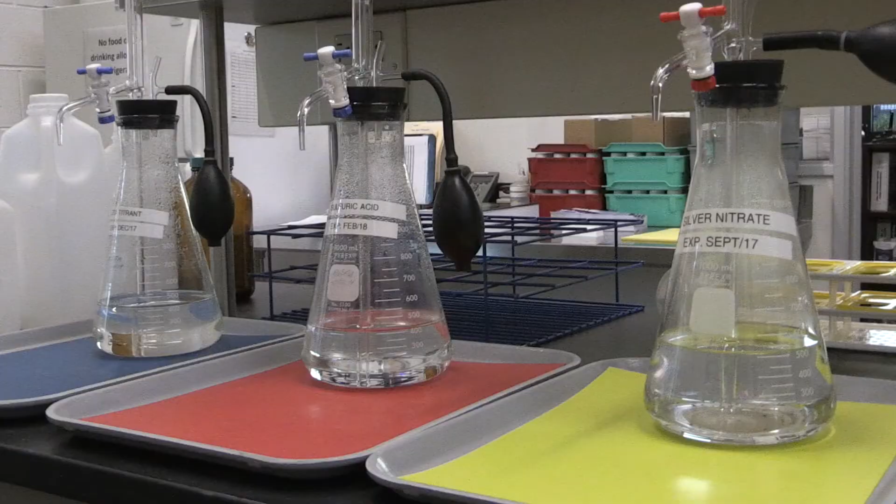I'd also like you to note that this is the utility yard where we are today. This is where all of our water, sewer, and storm drain crews are based out of, as well as our GIS, water quality, and water conservation. That's all here.

Also, we have the main corporate yard off Gothard, if anybody has gone to get sandbags during the winter or anything like that. Been to both locations. That's where we have our general services, inspection, maintenance operations, and signals and lighting operations housed. In addition, that is where we do material storage, sandbags in the winter, and also fuel storage and fleet maintenance.

We also have another yard called the Park, Tree, and Landscape Yard, which is also off Gothard, just south of Slater. That is where all the staff and equipment for all the park maintenance that we do, the tree trimming, all the mowing, everything else that we do is based.

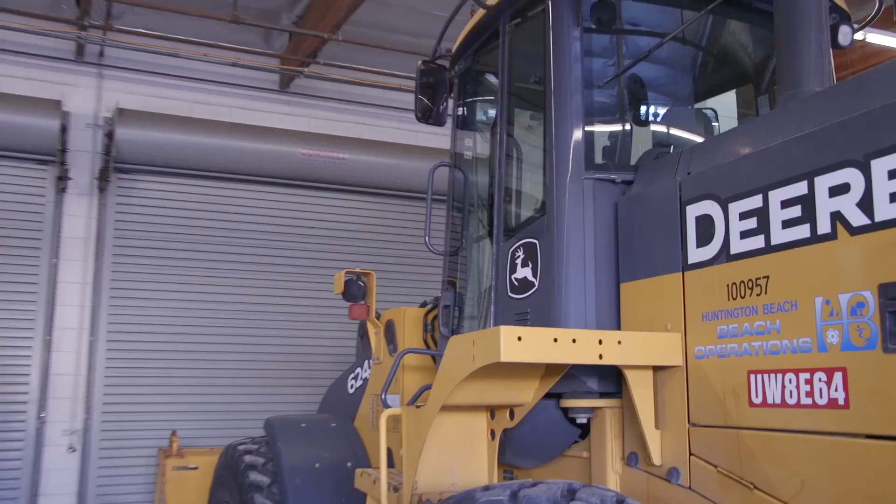And we have one last yard, which is actually a beach maintenance yard. Most of you may not know where it is. It's on Newland, right behind the AES power plant. That's where all the beach services is. They maintain all their beach equipment, all the stuff that sifts the sand and all those things that happen down there at the beach. That's where all that's housed.

There were 200 of them, and we all took a picture in front of our new senior center. Just so you know, the Public Works Department managed the contract to build it. So that's just another one of the things we do in Public Works.

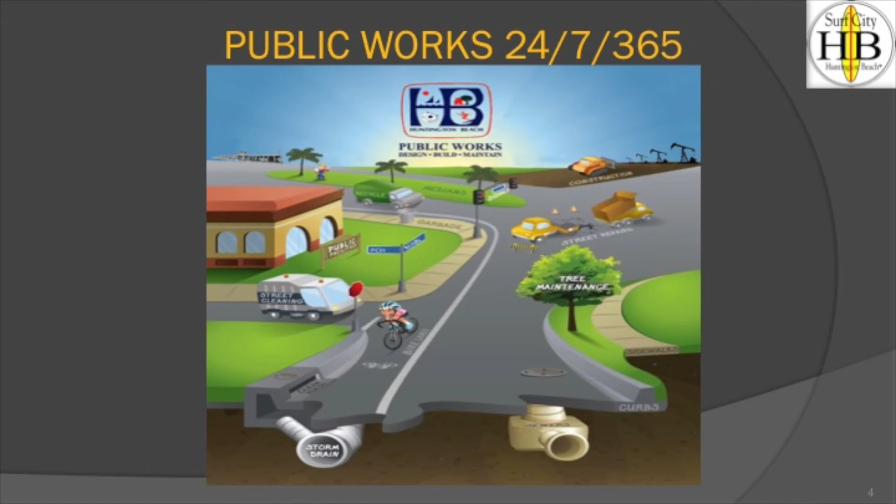Public Works is the foundation for our operations and maintenance of all the infrastructure which we have in the city. We have everything from street signs to our public facilities, refuse, medians. We actually manage the construction, street repairs, tree maintenance. We've got sewer, storm drain, we have it all. There's a lot of other cities in the county, like Irvine and others, that don't have water—they have an agency called IRWD that handles their water. We do it all. There's nothing that we don't do here in the city, other than we don't treat our own sewage. We get it to the sanitation district, but we don't treat it.

So what Public Works does, in a broad nutshell, is all the infrastructure planning, construction management, operations and maintenance of the city, which involves selecting and managing consultants and contractors, developing solutions or design concepts. We prepare RFPs for design and bids for construction. We also review development plans and entitlements.

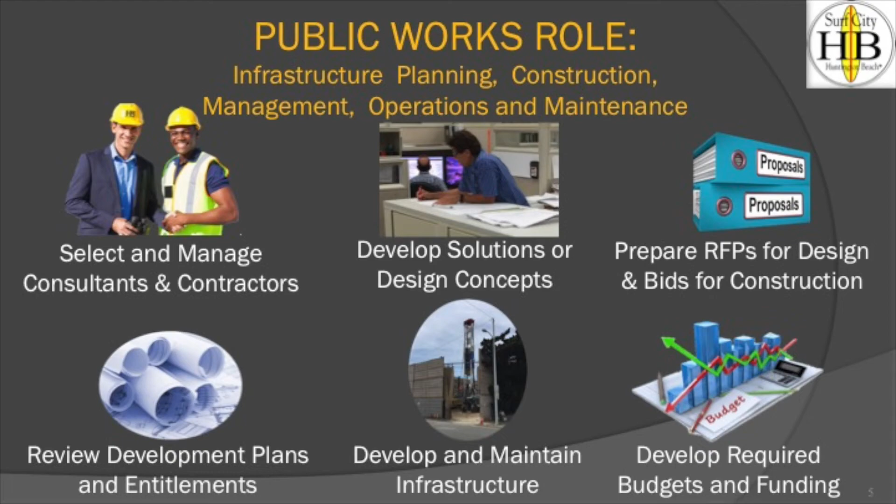All those people that come through with a single-family residential room addition, everything to Bella Terra, to wonderful stuff going down at the beach. We develop and maintain our infrastructure. We develop the required budgets and funding. We also coordinate and manage outside agency utility work—you see Edison in here, Time Warner, Verizon. They all come through us for permits and we manage them.

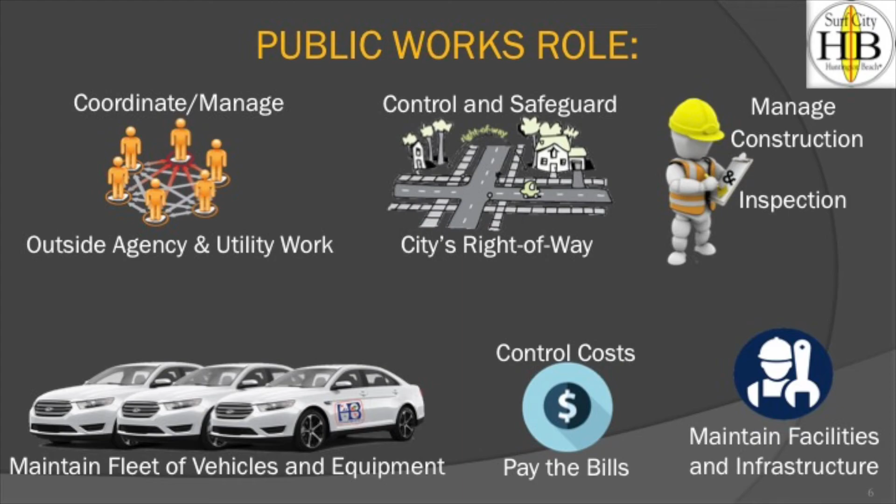We also control and safeguard the city's right-of-way. We manage all the construction and inspection, as I mentioned earlier. Jerry gets the fun of maintaining the entire fleet of vehicles, so we do all that here also. We control costs, we pay the bills, we maintain all the facilities and infrastructure, and we also do a lot of construction notification.

In addition, we do a lot of public relations and outreach like we do tonight. Whenever we have large construction projects, we always do a little bit of public outreach to the community, letting them know when it's going to happen, how long it's going to take, and how much they'll be inconvenienced. We also respond to a lot of Surf City pipeline requests. How many show of hands—how many people actually use the Go Request app? It's a great way to notify us of things that interest you, anything from tree trimming to you name it.

You just put it in the Surf City pipeline and we'll respond to you.

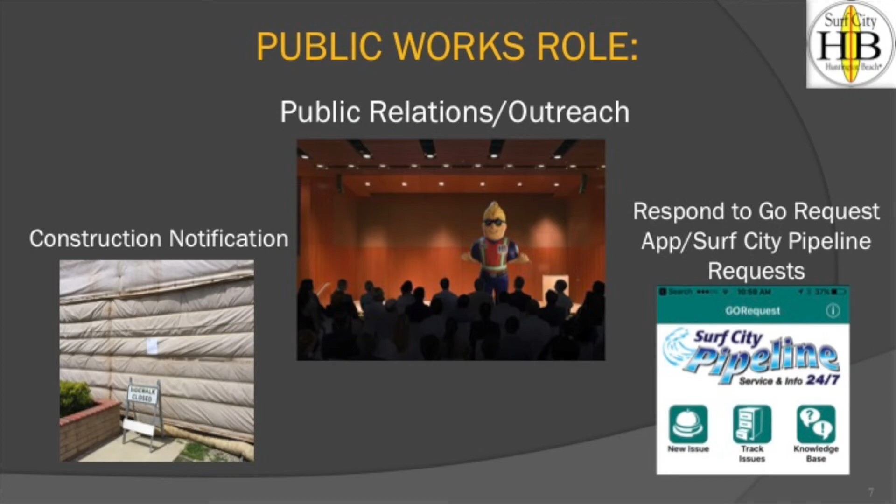It may be a good rule to not fix something that isn't broken, but with infrastructure, the lack of preventative maintenance is an expensive and sometimes dangerous tactic, and we call it deferred maintenance. The results come from too few dollars spread among too many competing interests.

So what we do is prioritize and strategize everything we do in public works, which leads into how we plan how we manage the city. We use planning documents such as the general plan and circulation element. It tells us what streets we have in the city and how we manage all that. We have a bicycle master plan. We do a lot of traffic signal modernization and rehabilitation. We plan all that out.

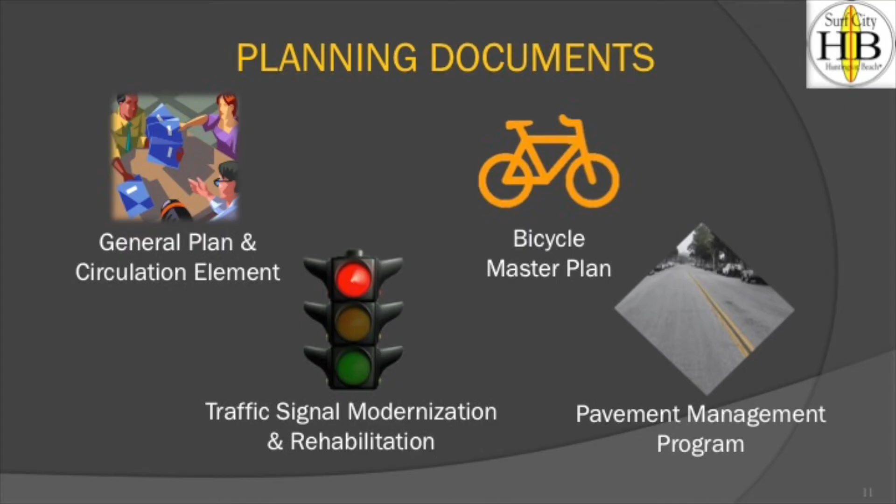We have a pavement management program. I have boards back there, where Tony's standing, that show going out 7 years where we're going to be within the city and how we plan to manage all the arterial rehabs, as well as the zone maintenance we'll talk about later. In addition, we have a facilities maintenance plan that Jerry takes care of.

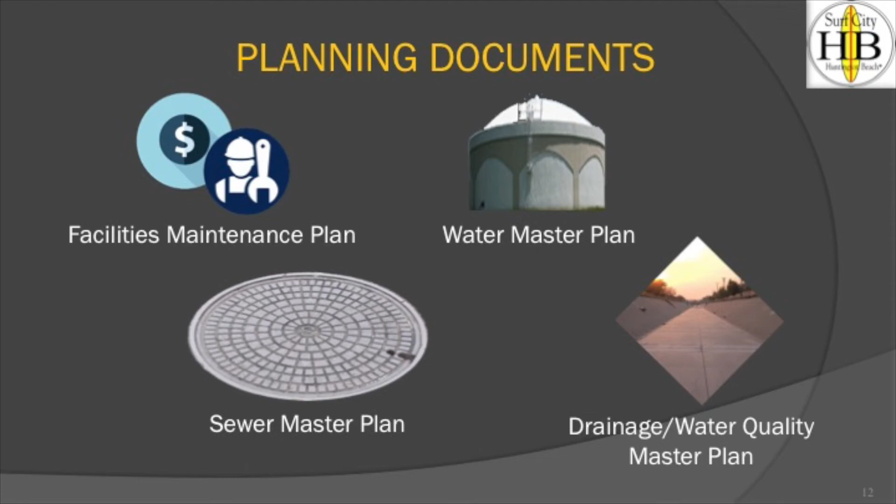We also have a water master plan. Most of the city was built in the 50s, 60s, and 70s, so guess what, we're about 50 years old on a lot of that infrastructure. So we use the water master plan, sewer master plan, and the drainage and water quality master plan to guide us how we move forward, looking at the asset.

You know, the pipes in your house, right? A lot of you had to redo them with copper or line them. Same thing with the city. Once they hit about 40 or 50 years old, we have to plan, because we don't have all the money at once to do it. So we have to plan how we spend our money, and it's like a 20 to 30 year plan how we do that maintenance. And another thing we do is emergency response.

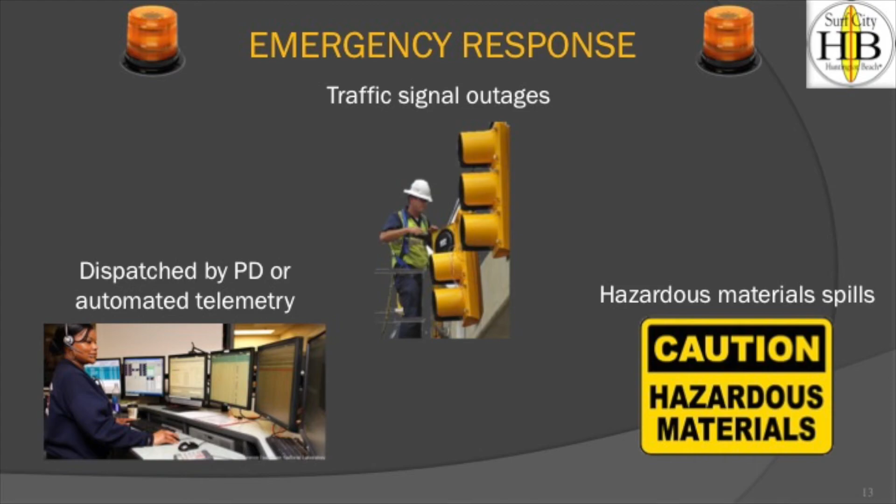Public Works is available 24/7, 365, to handle things such as traffic signal outages. We get hazardous material spills within the city. We also get water line breaks, not like LA, ours are small, you don't see the sinkholes. We also deal with storm drains and channels during floods. Sometimes we have to respond to issues with clogged drains and things of that nature. 24/7, 365, we're there for sanitary sewer lines and lift stations, and also just street tree damage.

We had some big rains this last year. We had a lot of downed trees. Our guys were out there instantaneously with contract crews and our crews to help pick those up, get them off the streets, and keep the city safe.

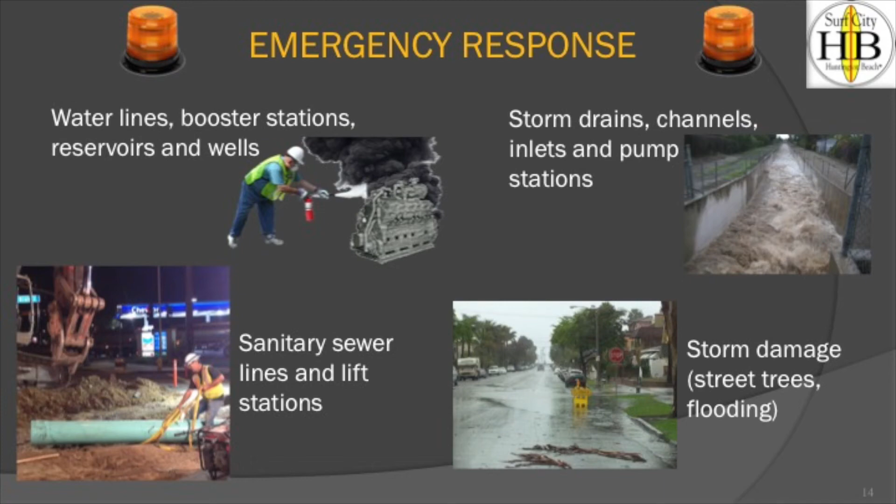Now I'm going to turn it over to Ken Dills, who heads up our Administration and Finance Division.

The exciting stuff now. By the way, it's all about the money. Yeah, municipal accounting, it's like cliff diving, hang gliding, municipal accounting. It's exciting stuff.

Anyway, just a brief overview of our budget is what I'm going to discuss, and this is our 16-17 current fiscal year. We have $104.2 million roughly as our public works budget for the year. Of that amount, over half is actually with Brian right here with the water utility and the sewer utility. So when it comes down to it, we get about 25 million for public works to do what we do in terms of keeping infrastructure upkept for the parks, the streets, and all that.

That amounts to about 12% of the total general fund that the city gets. The general fund is basically your property tax, TOT, all the fees and stuff. It's also the least restrictive of the funds we deal with.

Government accounting is basically fund accounting. It's different pots of money, and most of them are very restrictive in what you can use that money for. The general fund is a little less so. We can buy police cars with it, we can fix roads with it, we can buy volleyballs for one of the rec centers. So it's the least restrictive of the funds. A good way to illustrate that is looking at our current CIP.

But anyway, that funds quite a bit of our stuff when the extra revenue is there. We have grants and other funds. That includes impact funds, development impact funds. Gas tax and Measure M is a good chunk. And again, the enterprise funds - that's our sewer and water funds that keep the sewer and water utilities going.

Just a little bit more about the funds, and like I said, this is going to be brief. Our state gas tax, we bring in about $4 million a year, and that's a restricted fund. As you can guess, it's basically everything within the right-of-way - the pavement, the curb, sidewalks in some cases that we can use those funds for, but that's it. We can't, for instance, go into the Denny's parks and plant trees with it, or do any kind of maintenance on the beach. It's strictly for roads and bridges and such.

Like I said, we get about $4 million from those funds a year, and we're real excited actually. In 17-18, I don't know if y'all heard about SB1, but it introduced a new tax on the gas, which will provide next year an extra $1 million. Down the line, it looks like it'll be about $3 million. So it may hurt at the gas pump, but at least the road, when you're getting there, will be nicer, because it'll give us that much more money to do what we do, and maybe bring up our pavement index a little more.

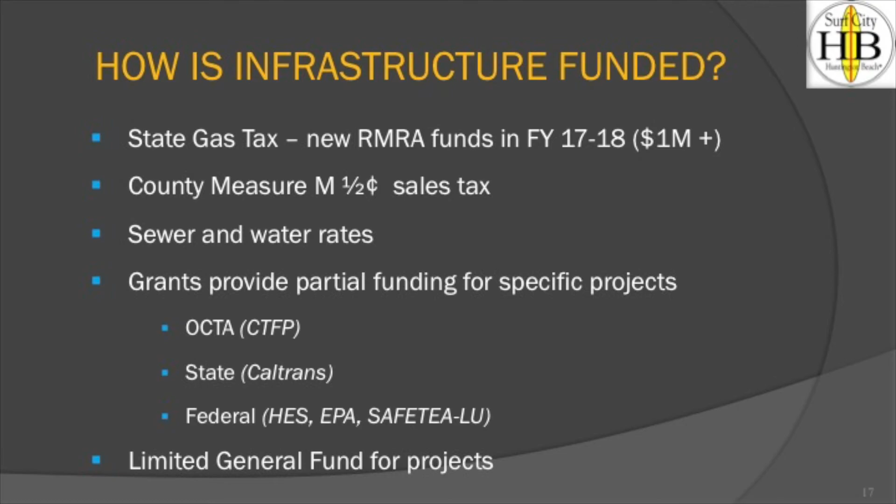The sewer and water rates, like I said, is over half of our budget, and a lot of it is operating. It's a big operation, it takes a lot of money. For instance, just purchasing water to put in your pipes is $16 million, and that's a big chunk. That's paid for basically when you pay your water bill. That's where it goes - it goes to keep up those systems, keep up this yard, keep up the equipment that keeps everything flowing like it should.

Grants is another really huge part of what we do. Grants tend to be usually specific to a project, and we've been very successful in getting grants. We're always looking for them, we're always applying for them. And when the funds are there, we try to get them so it can help what we do.

And also there's the impact funds. We have three we deal with - traffic impact, that Bob may mention later, we have a sewer development fee, and we have a drainage fee. And again, those are all restrictive. We can't use the sewer development fee to, say, do a storm drain. We can't do traffic impact to just pave some streets. Traffic impact is usually traffic, transportation-related signal type of things.

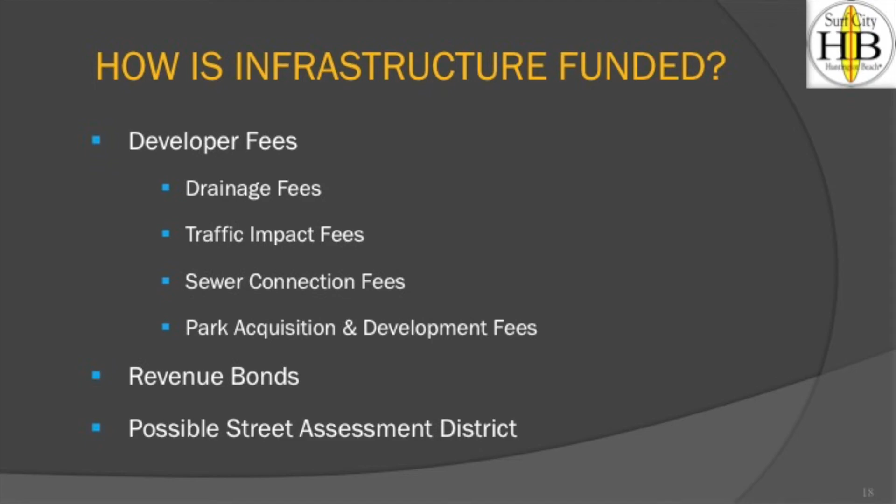Lastly, the general fund. We do get a chunk of general fund to do projects. It's not that much - it's $3.6 million this year. It's limited, there's only so much we can get. Usually, I can't remember what it was this year, Tom, but I think it was about $9 million worth of requests for general fund projects, and we were only able to fund about 3.6. So that really kind of wraps up what I was going to talk about. Like I said, I know it's exciting.

We had a pavement blue ribbon committee a couple of years ago that discussed street assessment districts as a possible way to get roads done. That got shot down by the committee. They decided it just wasn't feasible for Huntington Beach, and also that our pavement condition index compared to other cities was not that bad. So they didn't think that would fly, and it's kind of a dead issue, at least for now.

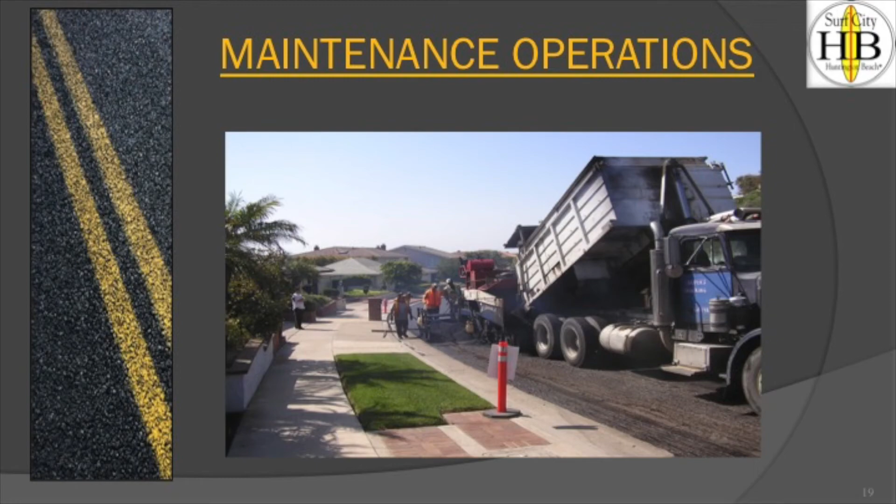Maintenance operations is all the maintenance that goes on after the CIP. The CIP rebuilds the roads, so what do we do in the interim? We maintain them. That's the maintenance operations division, which is Denny Bacon's division, and we have Derek Livermore in the back who's up with streets, here tonight to help answer any questions later.

What they do is oversee landscape maintenance of all our parks, medians, and facilities. The city has 71 parks. It's a staggering number if you really put that into perspective. It includes Central Park and the Sports Complex, 25 city-owned facilities, and over 500 landscape medians and cutouts.

They also oversee tree maintenance of over 50,000 trees within the city. This includes tree trimming, removals, planting, and emergency services. Remember, I talked about a tree falling over—we got to be out there even though nobody hears it, because does it really fall if nobody hears it? No, just kidding. And they also oversee street maintenance with over 315 centerline miles of residential pavement.

I'll talk a little bit about that later. They're also in charge of street sweeping and hazardous materials—we get spills of oil and things of that nature. We've got a real rich history of petroleum in the city, and guess what, there's a couple areas in the city where it actually still burps up out of the ground a little bit, in front of people's houses, so we get to deal with that too.

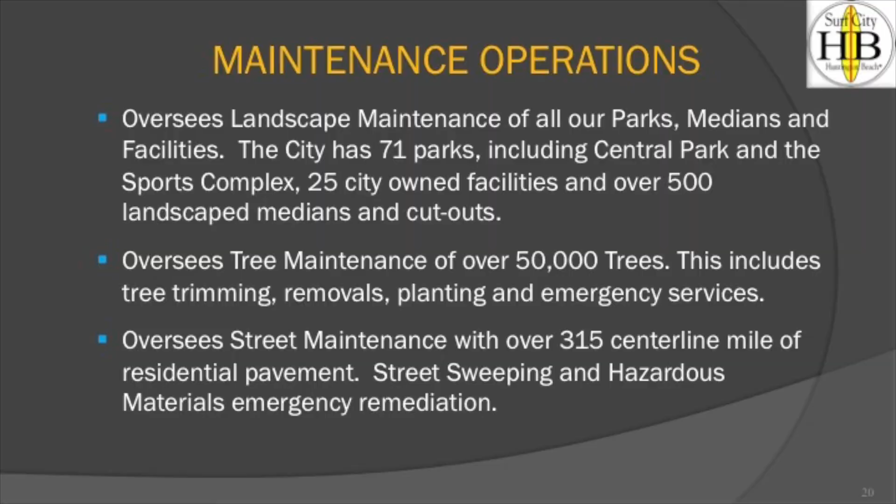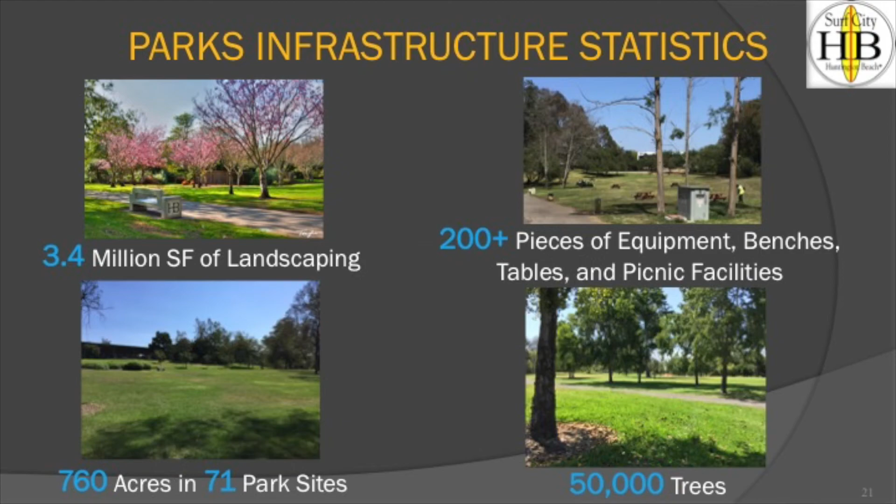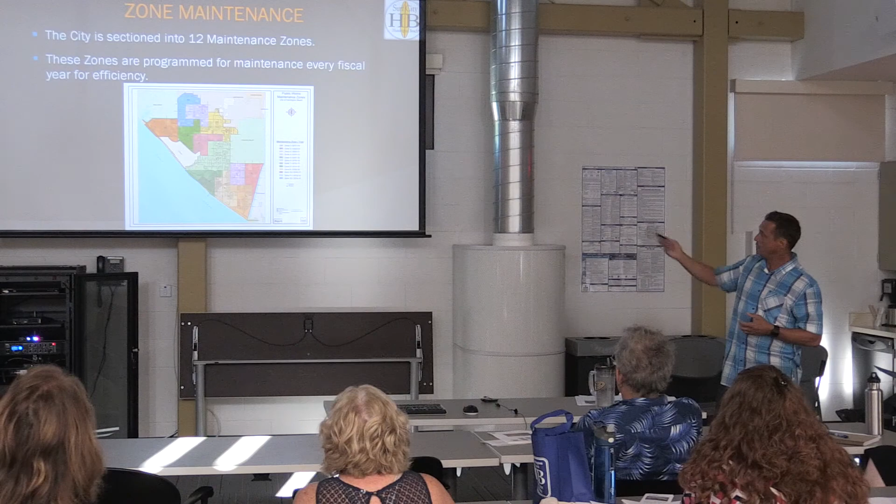760 acres, it's a lot, in 71 parks, and I also mentioned 50,000 trees. So we mentioned earlier we have broken the city into a zone maintenance program, a systematic way for us to maintain our infrastructure. There are 12 maintenance zones, and zone 1, which is kind of like southeast Huntington, is our next zone next year. These zones are programmed for maintenance every fiscal year for efficiency.

So what we do in those zones is tree trimming and tree removal. We do concrete replacement, uplifted sidewalk, curb and gutter. Huntington's flat—people think, oh, Huntington, it's flat—but you see standing water in the gutter all over the place. As we go through these zones, we fix those.

We also have what's called tree petition streets, where we have some very older streets where the sidewalks are severely uplifted, and we come through and basically replace the whole street—rip out all the trees, replace all the sidewalks, replace the entire street. And when we do that, we also fix the sewers and things of that nature.

In those zones we also do crack seal, overlays, and slurries. Not always does the street need a new coat of pavement—sometimes we can just paint it black with slurry and preserve the life of the street.

We also do localized pavement repair. You got rutting—one of the biggest things we deal with a lot is our cul-de-sacs. Trash trucks tear up the cul-de-sacs immensely, so we do a lot of work on the cul-de-sacs when we're in the maintenance zones.

We also do utilities maintenance. I mentioned a lot of people have issues with their sewer laterals in the city because of the trees in the parkways, and we have a sewer lateral program. So when we do the maintenance zones, we actually go in and fix those at the time so we don't dig up the street twice. And we also upgrade all the traffic signs and markings.

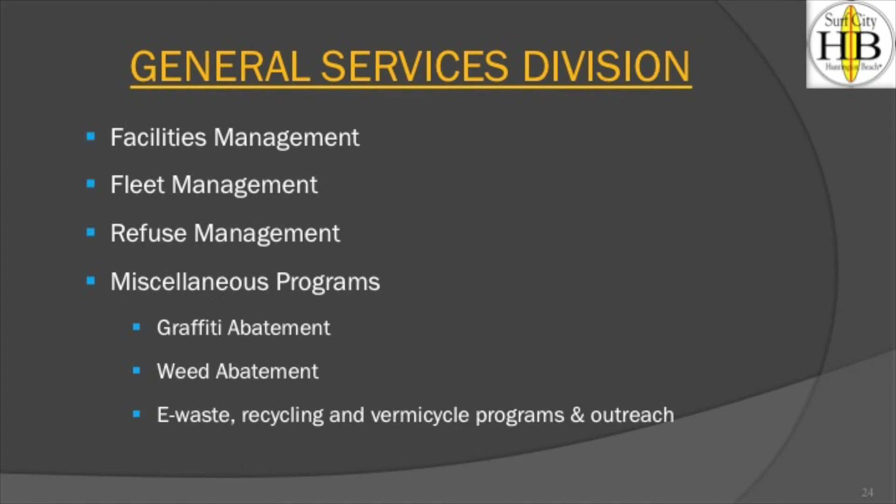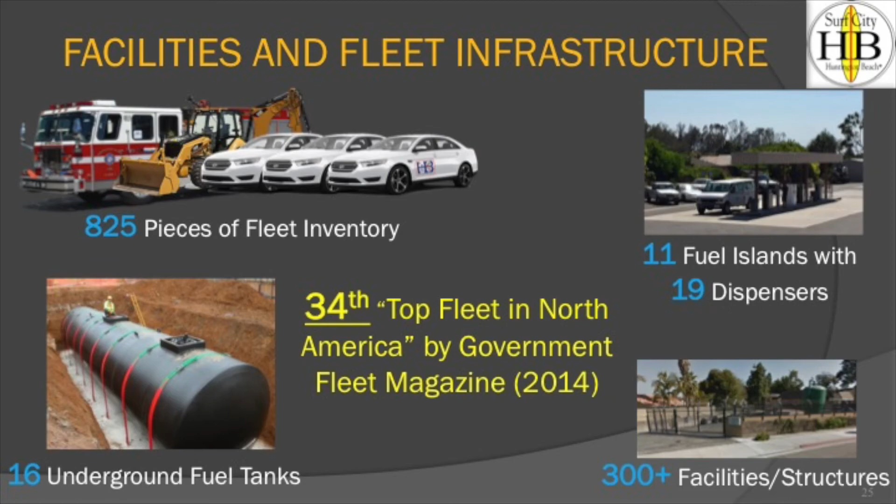Facility operations is responsible for carrying out maintenance and repair of city facilities and facility equipment. We also manage the building automation systems, which control our HVAC, lighting, door access systems, to name a few. We also oversee and manage facility improvements and renovation projects, including ADA improvements. We oversee equipment replacement, and we conduct facility condition assessments regularly.

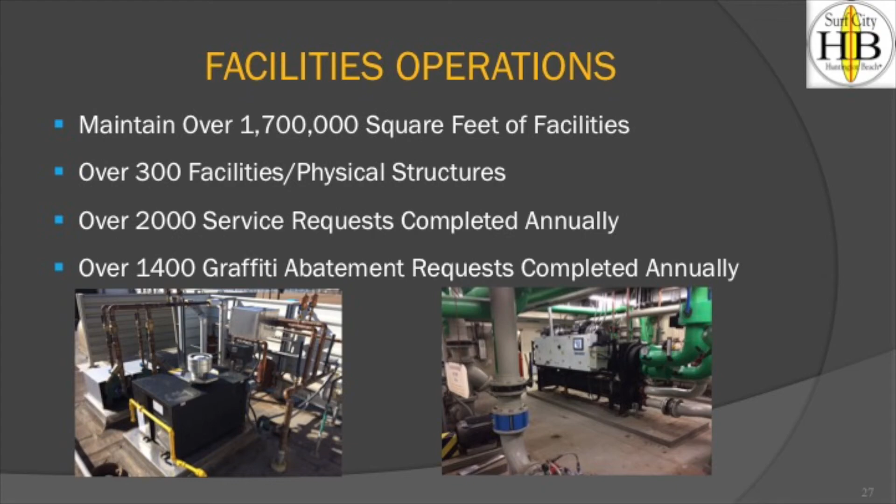In facility operations, we maintain over 1.7 million square feet of facilities, and that's over 300 facilities and physical structures throughout the city. Most people are aware of the community centers and libraries and fire stations and City Hall that we maintain.

But then we have a number of park restroom facilities that we maintain, pump stations, lift stations, lifeguard towers. So there's many more facilities or structures that most residents aren't aware of that we maintain. We complete over 2,000 service requests a year, and we complete over 1,400 graffiti abatement requests a year.

In fleet operations, fleet's responsible for fleet asset management, fleet equipment replacement. We do an annual replacement request. They're responsible for preventive maintenance and regular and emergency repair services, towing services. We do parts management, fuel management, body and collision repair, and warranty management.

Part of the fleet inventory are all the marine safety vessels as well. So we have fire equipment, the entire city fleet, fire, PD, marine operations, as a part of our inventory.

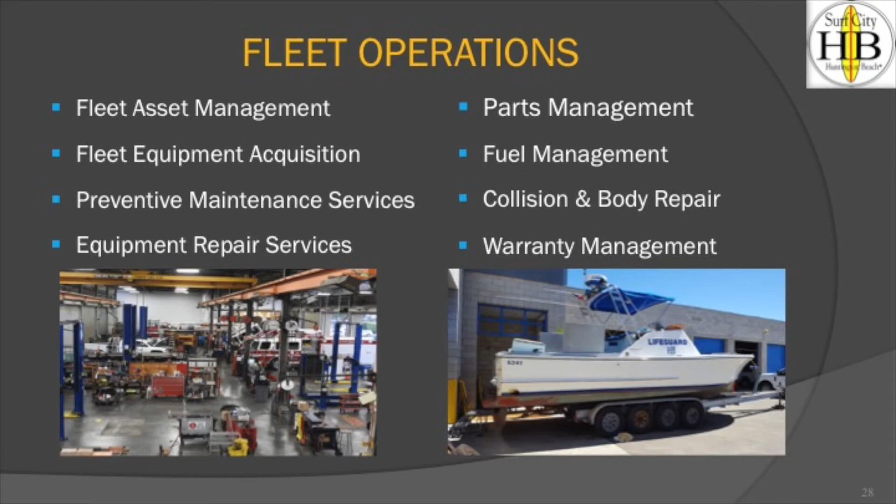Fleet operations maintain over 800 pieces of fleet inventory. We often refer to that as rolling stock. We have 16 underground fuel tanks with a total capacity of 120,000 gallons of fuel, and 11 fuel islands throughout the city.

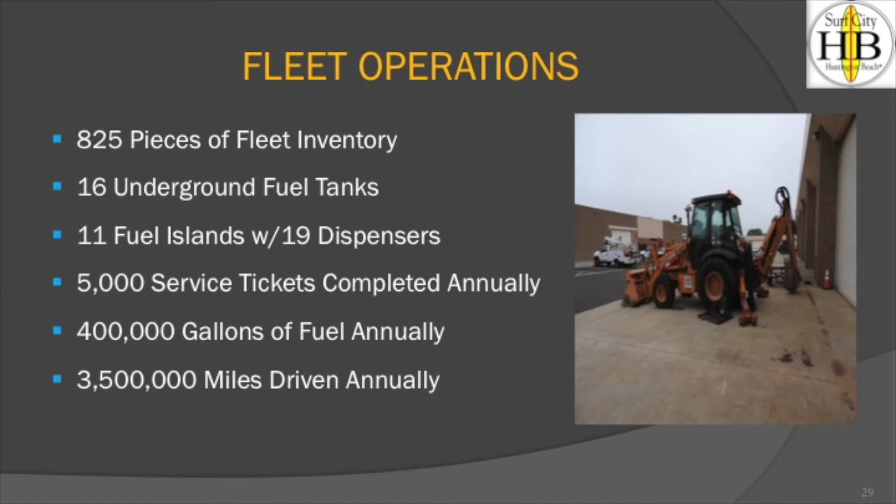We complete over 5,000 service tickets annually. We go through 400,000 gallons of fuel and rack up 3.5 million miles driven on our equipment.

Refuse operations, we manage the refuse franchise agreement. And through that agreement, we manage the contracted residential and commercial refuse services.

We implement and administer refuse programs. Typically, these are mandated by the state. These are required recycling programs, diversion programs, organic waste mandates.

And then through our refuse ordinance, we conduct code enforcement. So we watch out for scavenging, carts in view. So that's general services, and now we have Bob.

Thanks, Jerry. So I oversee the transportation division, and that division has 3 different sections.

If you remember from one of the early slides that showed the entire structure, actually the transportation division is one of the smallest with only 12 full-time staff members. However, we actually span a fairly broad area within the city and the different things that we do within our section. Overall, we manage a system that includes 143 traffic signals.

In addition to those signals, we also have a lot of flashing beacons and other electronic signs around the city. You've probably seen radar feedback signs where you drive down the street and they tell you how fast you're going, the ones that are mounted on poles in different neighborhoods and streets. Those are also maintained under our group.

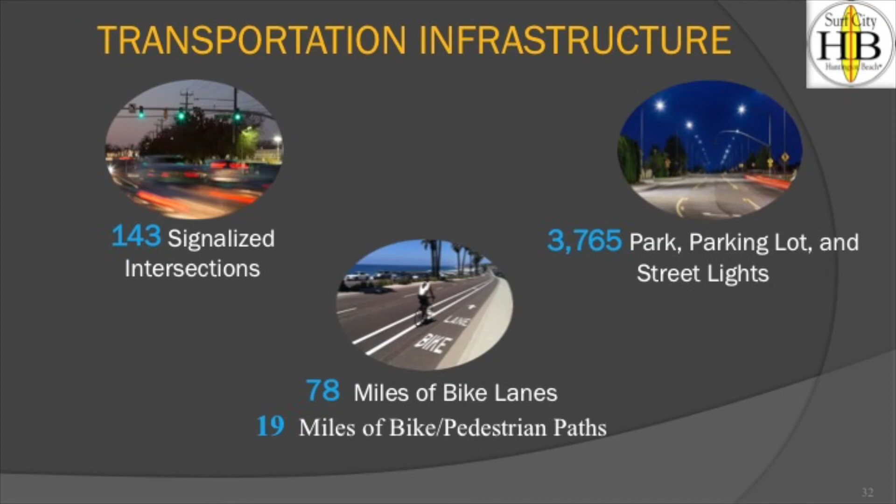We also have markings on all of the streets. Our group maintains those. We have hundreds of miles of overall markings, including, I know Tom noted here, 78 miles of bike lanes, but all of the markings on the roadways that indicate where the lanes are, the arrows, crosswalks, you name it, those are all maintained by my group.

We also have all of the signs that are on the street. So there are roughly 50,000 signs throughout the city that we maintain. And that becomes a bit of a challenge for us because they're certainly spread out, but we have a propensity in the city to get stickers on our signs. So just the process of going around and pulling stickers off of our signs and dealing with graffiti is one of our biggest challenges in trying to keep up with the maintenance.

So within engineering and management, that's the section that I mostly interact with, even though I oversee all 3. The maintenance divisions essentially run separately. I work mainly out of City Hall, where we have our engineering staff.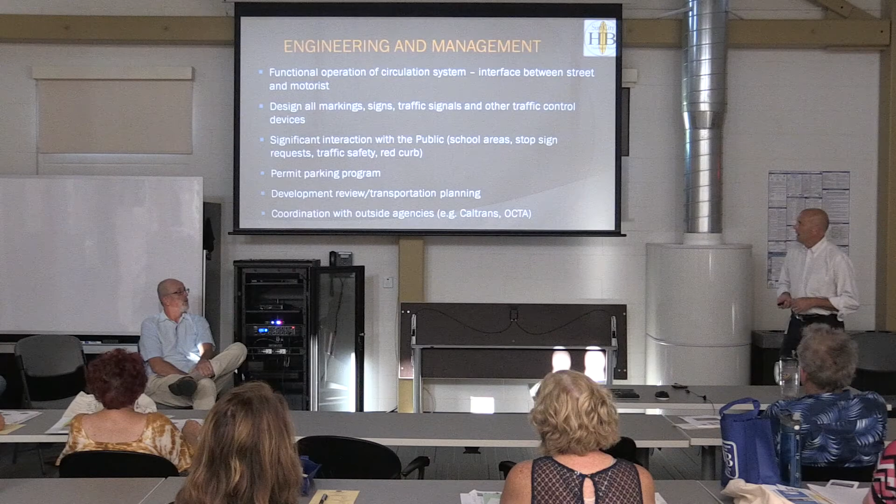As you can probably imagine, we have a lot of school districts and a lot of schools in the city, and that generates an awful lot of issues for us. There's a lot of activity that happens around the schools during pickup and drop-off time, and we have a lot of interaction with the different school districts and the public on school-related issues throughout the entire community.

We also have a permit parking program that we administer. We are very much involved in the planning and new development within the city, reviewing projects and trying to ensure that they are designed in a way where the access works with the street system, that they're not adding too much traffic to the street system, and that we can accommodate them or provide the improvements needed to accommodate that additional traffic.

And we do a lot of coordination with other outside agencies, key ones in the city. OCTA, mentioned earlier, is a regional body that deals with regional transportation issues. And Caltrans operates Pacific Coast Highway and Beach Boulevard in the city, and also the 405 freeway that skirts the northern part of the city.

We have a division that does all the maintenance on the traffic signals and the street lights. We are in the process of expanding our street light inventory from about 1,000 street lights as of 6 months ago to roughly 12,000 street lights. Probably by the end of August, we will have all of them acquired from Southern California Edison.

That's a very long story. I won't get into that too much, but it is a very big effort, and we hope that it will be very much a benefit to the city when it's all completed.

I already mentioned that we maintain all the lights in parking lots at the different facilities throughout the city. Jerry mentioned 300 facilities. Most of those, or at least a chunk of those, have parking lots and different kinds of markings and lights in the parking lots.

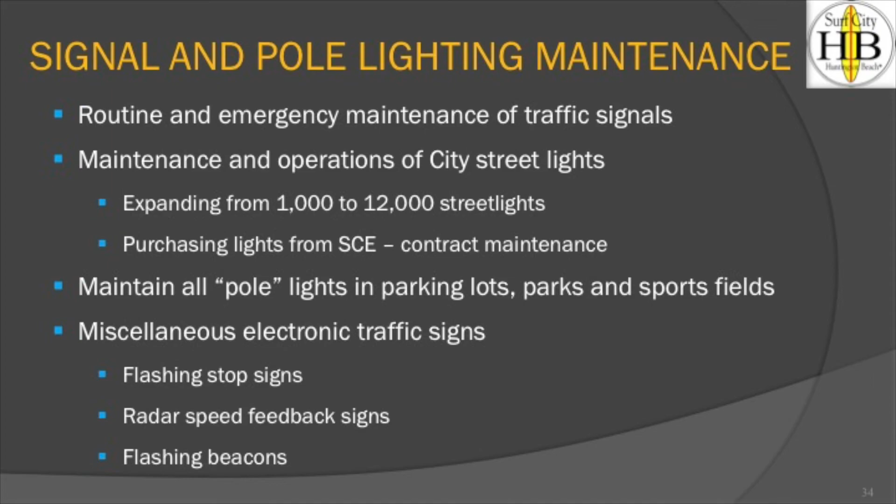And our third group is the sign and marking maintenance. Again, I mentioned how we have all the markings on the streets, all the markings in parking lots, signs - that's what we maintain. We even do signs within facilities. So if somebody wants even a nameplate for their desk, that comes through my group, and we have the ability to fabricate those in our sign shop.

One other key thing that the public gets to interact with my group on is we tend to provide the staff that deals with street closures and things like that for special events within the city. We have a lot of those every year, more than 70 a year.

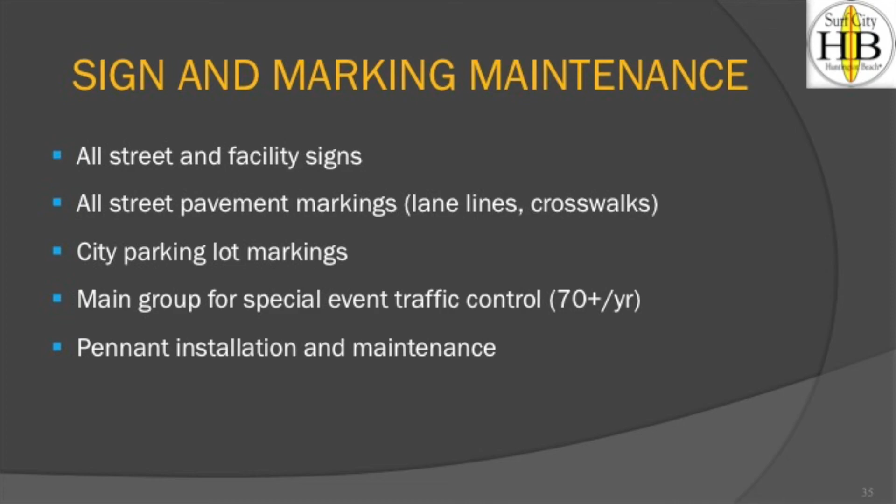One that happens every week you might be familiar with is the downtown Surf City Nights every Tuesday. My staff is down there every week, closing off the street, setting everything up, coming back later and removing it every single week. We also do the marathon, 4th of July parade, all the big events within the city, and we have some sort of traffic control and staffing that attend those.

And we also have little pennants that you probably see around town on streetlights and things like that. My group also maintains those, and they install them, remove them, etc.

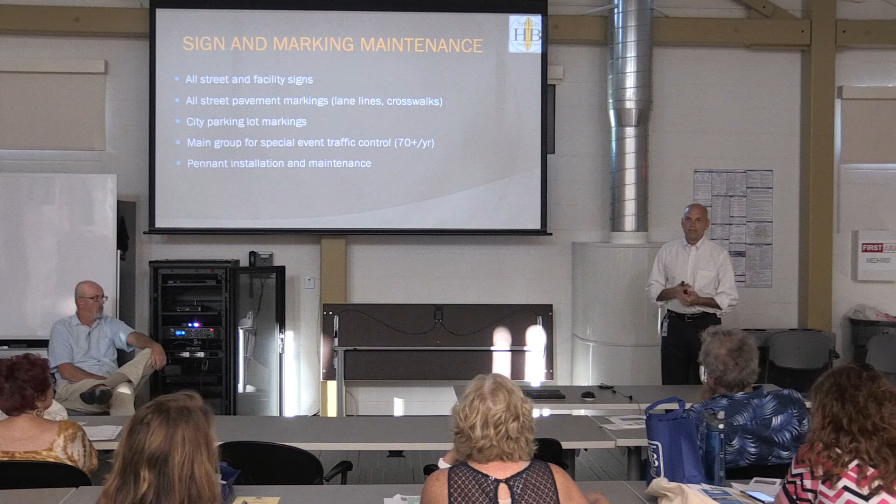And back to Tom for the rest.

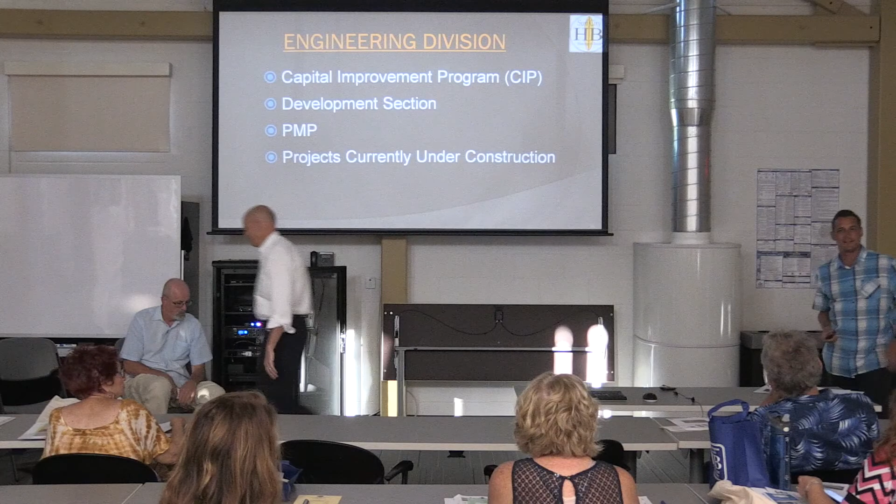All right, so in addition to playing Travis for 30 seconds a day and Denny for 30 seconds a day, this is what I do day in and day out. I manage the engineering divisions. I'm going to run through the capital improvement program, which is our planning tool, what we do in the development section, our pavement management program, to give you a little insight on how we plan our infrastructure, and talk a little bit about the projects currently under construction within the city.

Here's just some statistics I wanted to run through. We have 100 miles of arterial streets - that's like driving from Huntington Beach to Ventura, a long distance. Residential streets, that's Huntington Beach to Bishop, all the way up by Mammoth, so 316 miles of residential streets. We have 33 miles of alleys that are mainly concentrated in the downtown area, and we also have 4 million square feet of AC parking lots.

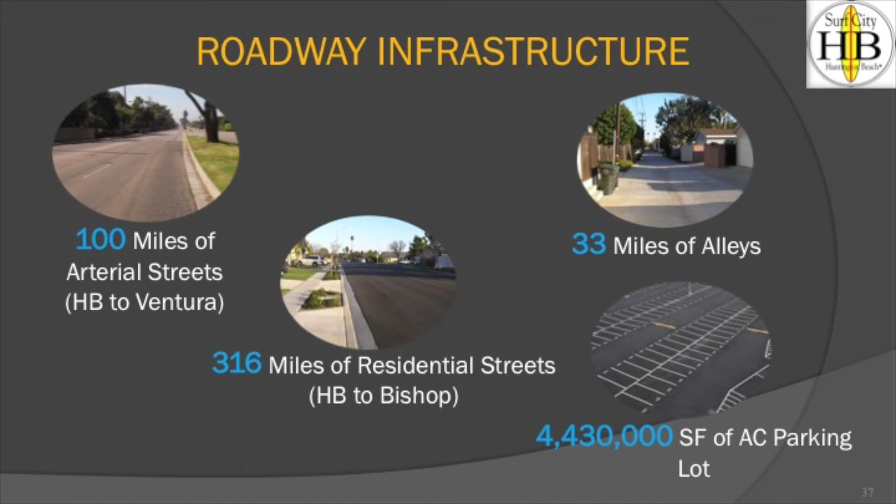The capital improvement program, you see here, we have about 24 million in projects this year. This is how we plan to maintain, as I mentioned earlier, all those planning documents I talked about. They all feed the CIP.

The categories we have are drainage and water quality, facilities, neighborhood—which is the residential program, concrete curb, gutter, streets and trees—parks and beaches, our sewer program, our streets and transportation, and water.

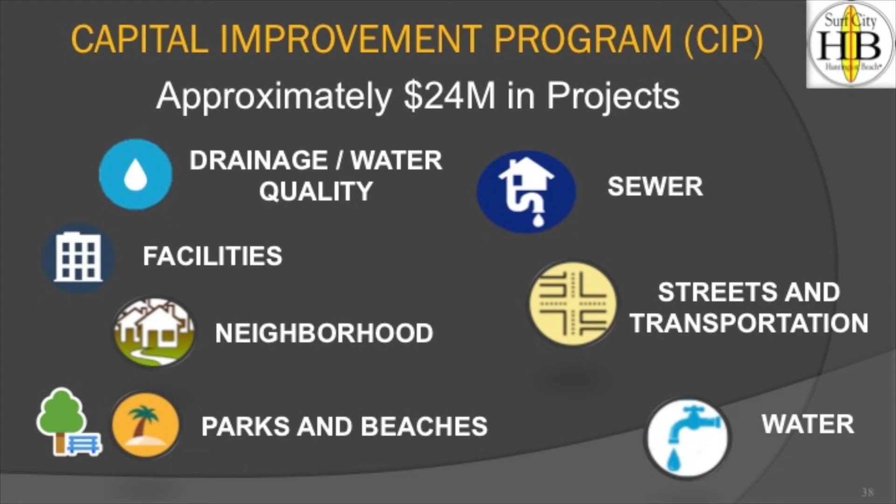My division also handles development. You come in for your single family residential, everything from Pacific City going up, to everything else going on, Bella Terra, Monogram. There's a little bit of development going on in Edinger right now—actually a lot. We do all the development review for the public right-of-way: water services, sewer services, widening streets, new curb gutter sidewalk, street lights. That all comes through us.

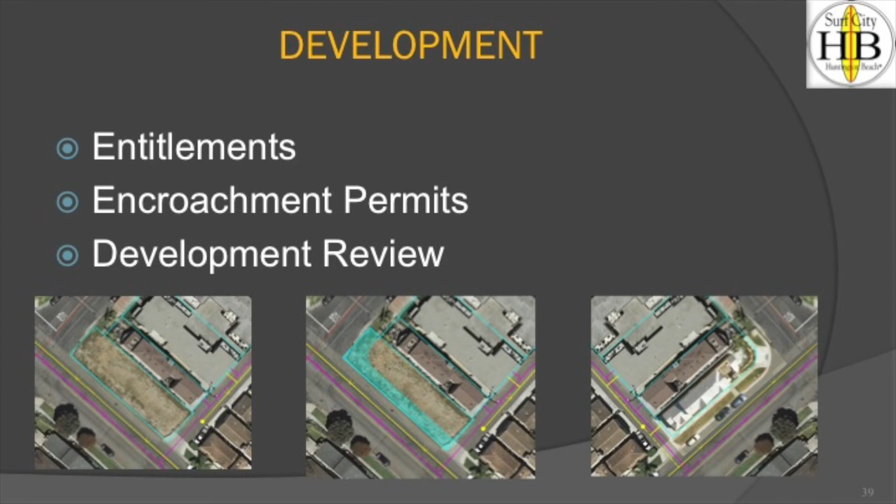There's the Beach Edinger Corridor specific plan, some of you may have heard about from planning or may not have. There are special lighting standards in some areas of the city, and we administer most of that.

I wanted to touch briefly on the pavement management program. Everyone knows we don't always pave the worst first. So we use the pavement management program to help guide us to use our money most wisely.

Really, it's a 7-year look ahead. We massage it every year based on needs within the city and available budgets, but we do a 7-year look ahead.

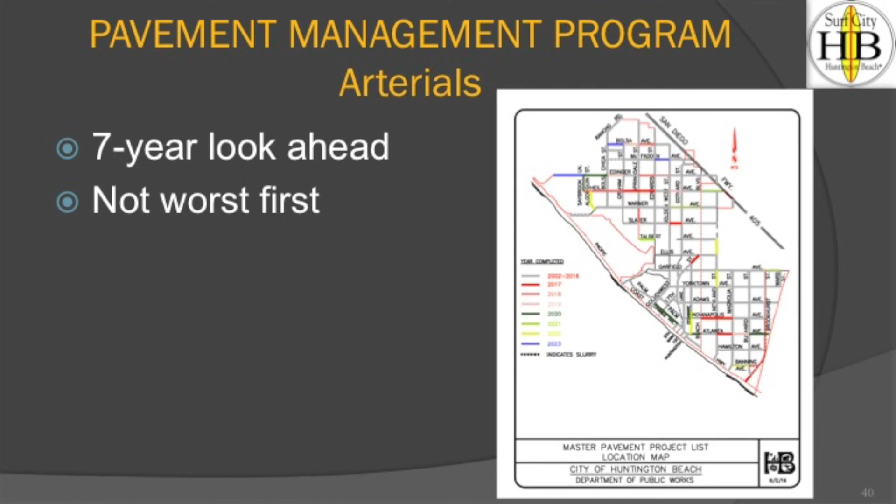Again, we don't do the worst first. When you drive Heil and Talbert, they're destroyed, really bad. But I can put $1 million into one section of Heil, or I can take that same $1 million and do 3 miles of just an overlay. So how do you manage that? How do you manage where you spend the money? That's a delicate situation for us.

So we try not to let the ones that just need maintenance deteriorate—we deal with those first. Then we let the really gnarly ones deteriorate a little further, because they're going to take a lot of money, and we'll do those big ones in a year. This is just an asphalt pavement life cycle.

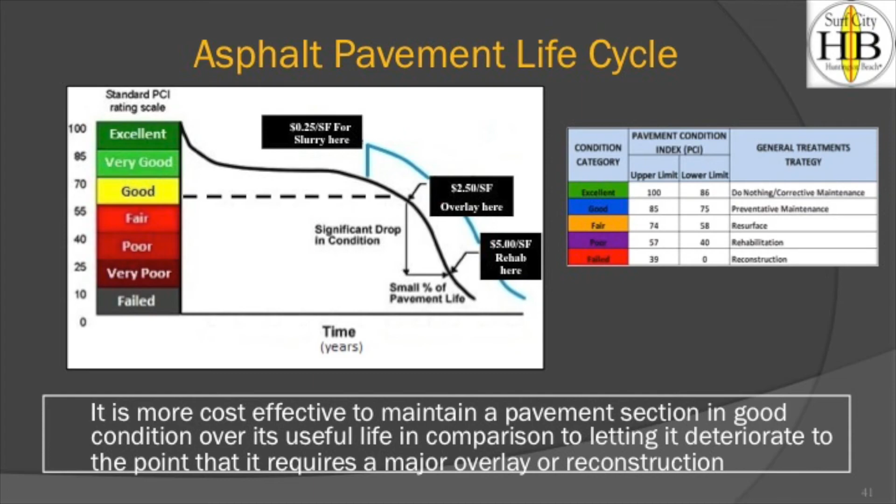See where the good is in yellow up there? There's a little dash line. We try to hit everything with overlays and slurries above that line. Below it is where it gets really, really expensive for us to rehabilitate the streets. So we try to maintain what we have and not let it deteriorate too badly.

It's kind of like your house—you don't let your paint go 10 years before you paint it. Then you're water blasting it off and chipping it off, and it gets more expensive.

What are the factors that affect pavement life in our pavement management program? We look at traffic volume and loads, weather, rain, extreme heat. We don't have the extreme heat like Palm Springs, but during August and September you'll see we get rutting in our streets—the pavement gets a little liquid sometimes.

The type of pavement we put down, the age of the pavement, the base material—we're an old watershed, a lot of our roads are on really yucky stuff that likes to move around quite a bit. So the unstable base material can affect the surface life of the pavement.

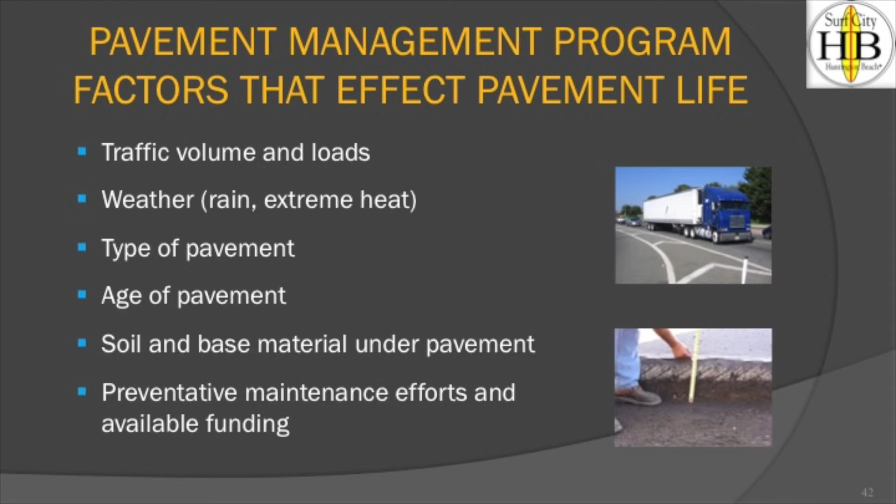Upcoming, we have Heil from Springdale to Edwards. We have Slater, Golden West to Gothard. And we're also going to wrap up Main Street.

We just did Main Street downtown a few months ago. That was quite an effort coordinating with everybody, but we got it done after Tuesday night downtown. There's no good time to shut down Main Street, because it just wants to go 24/7, 365, but we got that done.

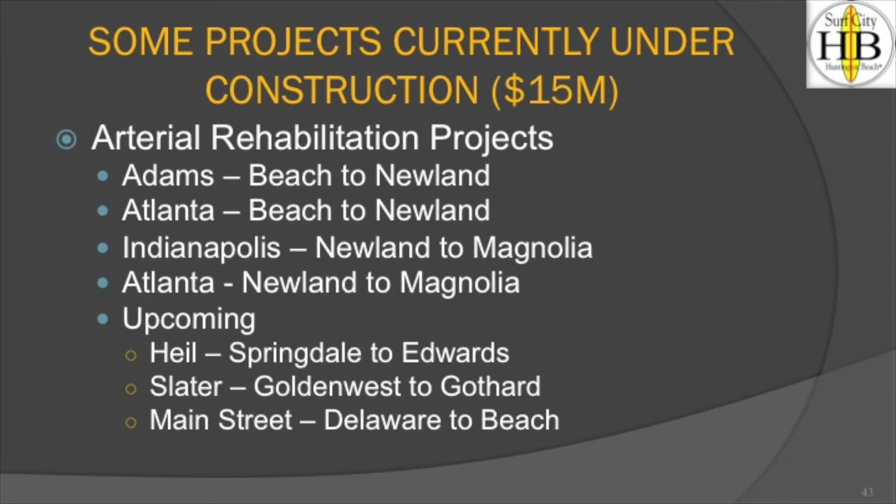There's a little stretch from Delaware to Beach that needs to be done, and we're going to be wrapping that up. And also, we're drilling 2 new wells right now, well 1 and well 14.

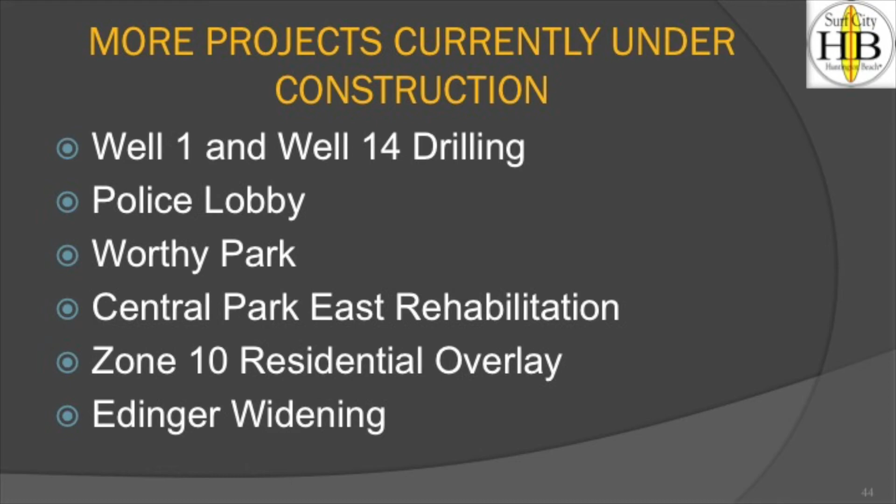We supply about 75% of our own water in the city, and our wells have aged, so we need to redrill wells. We're just finishing up our police lobby project, and we're in the middle of our Zone 10 residential overlay project right now.

As Tom indicated earlier, my division is responsible for the water, sewer, and storm drain systems within the city. Starting with the water infrastructure, we have over 600 miles of water lines in the streets of Huntington Beach. If you laid that pipe out, it would go from San Diego to north of San Francisco.

We're responsible for maintaining it. If there's a main break, we have to go out and repair it. If a contractor takes a backhoe and goes through that pipe, we're the ones that respond 24/7 to make that repair. Tom indicated that we get 75% of our water from the ground under our feet, and the other 25% comes from the Metropolitan Water District, which imports water into the LA area.

To get the water from our aquifers, we have 8 currently active wells, and we'll have 10 within the next year. For imported water connections, we have 3 — 2 on the north side of town and 1 on the east side — to make sure if one of the imported lines should fail, we have plenty of backup to get the remaining water we need. If we lose all of our imported connections, we can actually rely on our groundwater supply to meet the needs of the city, so we have a pretty nice backup available.

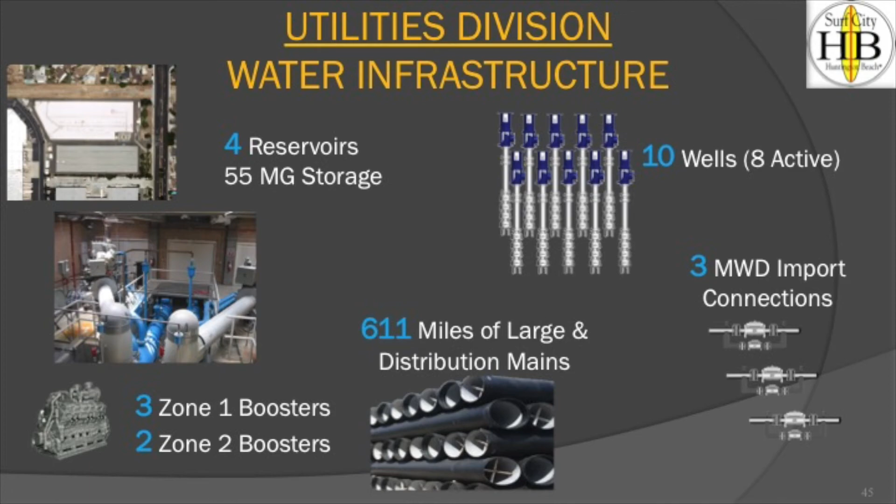Reservoirs — there are 4 in the city, and they can hold up to 55 million gallons of water at any given time. If we do have an earthquake, we've got plenty of water in those reservoirs to help supply water for firefighting and public needs in the event we need that.

We also have 53,000 meter connections, so we go out and read the meters every month. In some areas of town we have what are called AMI meters, which send out the meter read via radio. The whole city will have these special meters in place within the next 2 years. Our meter readers are being transitioned to other assignments, but having this many meters we can read ourselves through a radio system cuts down on the cost of meter reading and improves reliability of the reads.

We have over 5,800 public fire hydrants. We paint and inspect those every year to make sure the flows are acceptable.

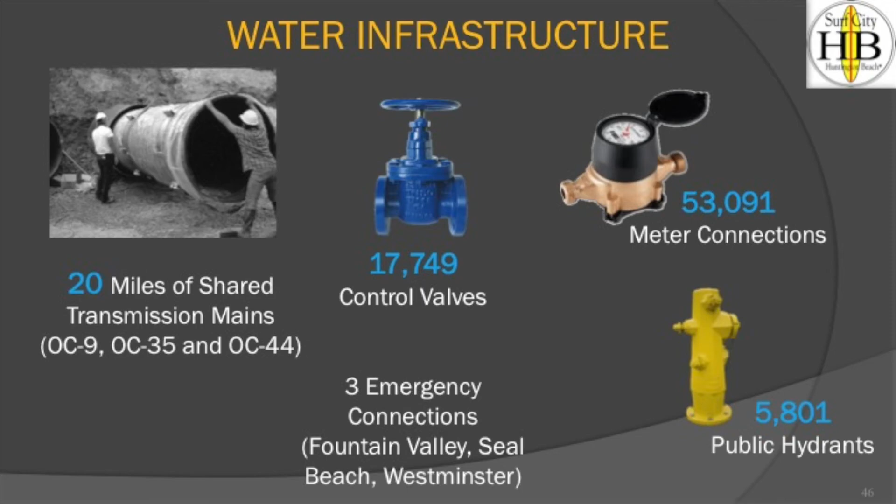We have almost 18,000 control valves in the system so that if there's a main break, we can shut 2 valves down on either side of the break, isolate that pipeline, and make the repair without putting a large area of the city out of water. We operate these control valves every year to year and a half so they don't get tight or rusted — they have to be able to operate if there's a problem. This is called exercising the valves.

On the storm drain system, we have 114 miles of pipeline and over 1,100 manholes. We maintain those along with the catch basins throughout town. We have to clean every catch basin once a year, preferably late summer to early winter, to prepare for heavy rains. When heavy rains come, if basins get clogged with debris, we respond and clean them out to minimize any chance of flooding and make sure people can still get access to their homes.

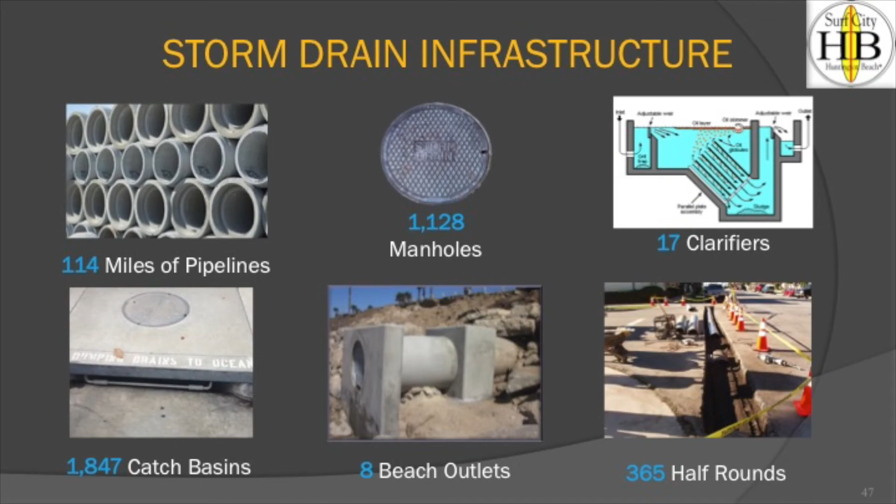Flood control infrastructure includes everything from 96-inch diameter pipes — we put a person in the picture to get a feel for how big it is, actually about this tall — to about 5 miles of open channels. It's hard to see in this picture, but there's a car in there; somehow the person lost control and went into the channel. So we do everything from cleaning the channels of regular debris to removing vehicles.

I'm aware of 3 cars that have gone into our storm drain channels in the last 20-25 years. We also use air bladders at Sunset Beach—I'm sure you've heard about the flooding there during king tides. Whenever we have major tides, we go into Sunset Beach and put these bladders into the pipelines to keep water in the bay or harbor from coming back through the outlet pipes and into the streets. That one bladder is about 14 feet long, and we use those to help minimize flooding in the Sunset Beach area.

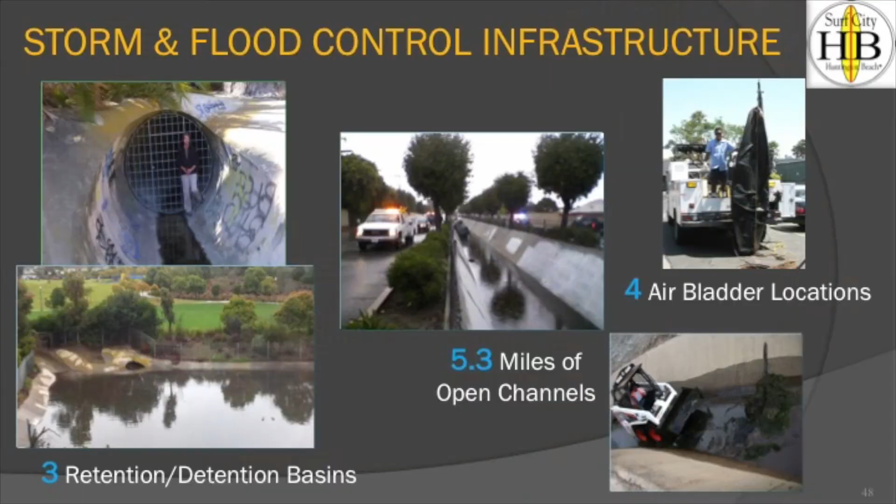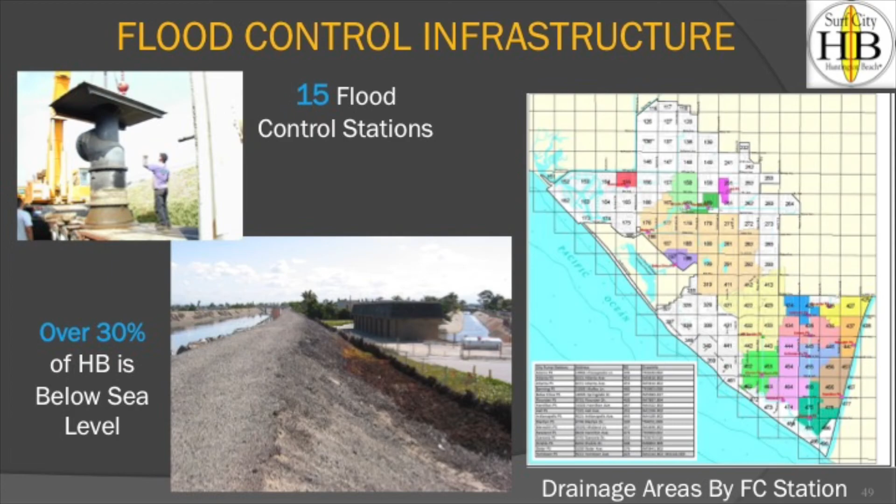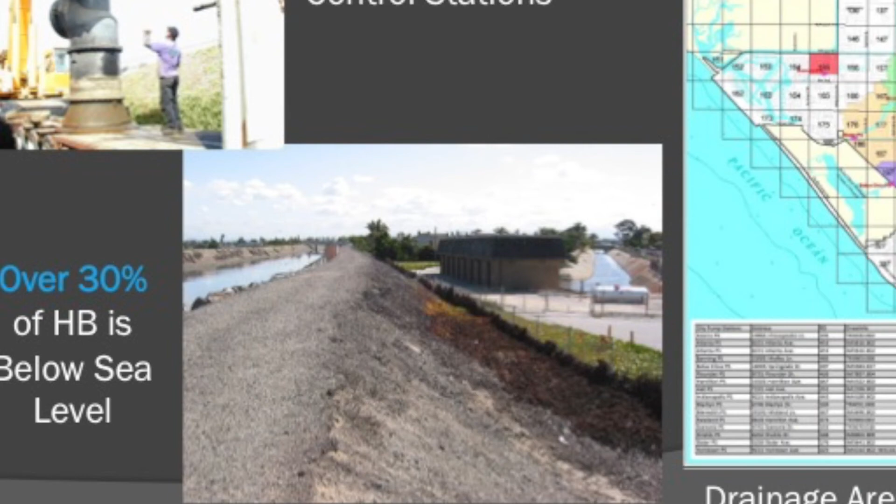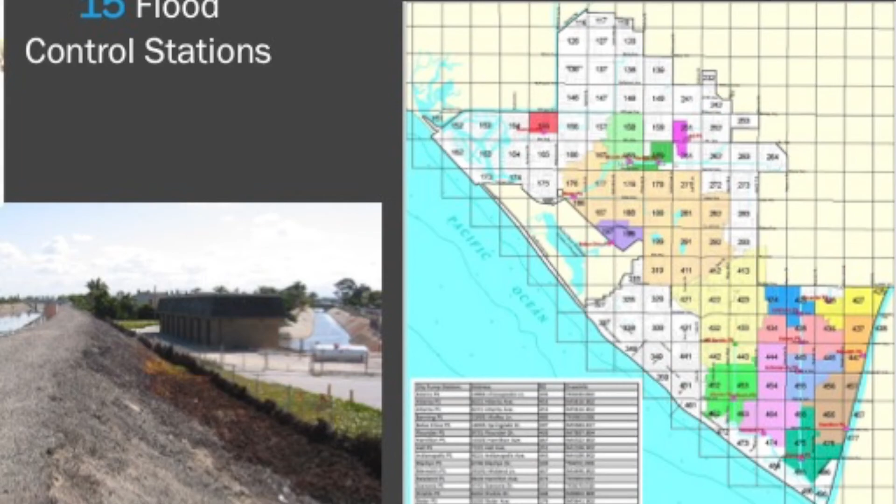For flood control infrastructure, we've got 15 flood control pump stations in the city. Most people don't realize over 30% of Huntington Beach is below sea level. In this picture, this is the Wintersburg Channel, roughly at sea level. Down the slope is one of our flood control channels that drains to a pump station, which pumps the water up and into the Wintersburg Channel. During the heavy storms in January and February, all 5 pumps at that station were very active but able to handle all the flow. We're responsible for maintaining these 15 pump stations, and each color on the map represents an area with its own independent flood control station.

On the water production side, we use about 10 billion gallons of water a year. If you can imagine a football field filled with water over 5 miles high, that's how much water we use in the city every year. That's where we utilize our wells and imported water connections to get that water.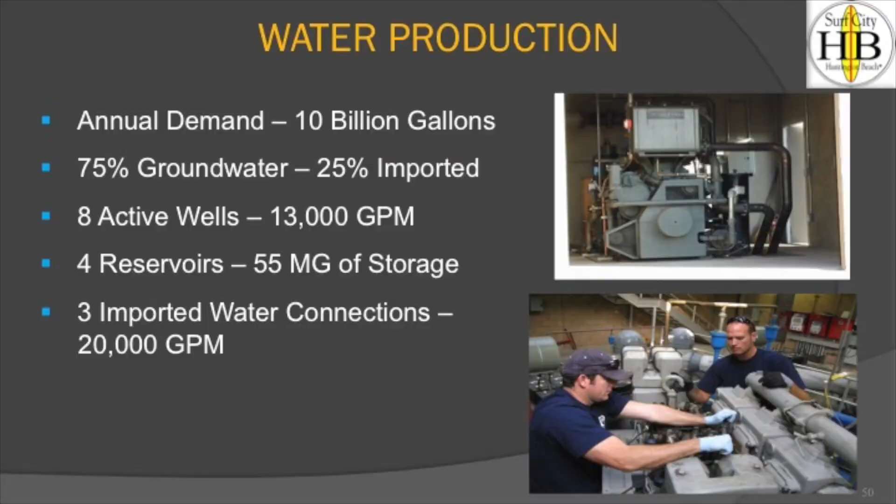For water quality, part of the tour today will be to visit the water quality lab to hear about the types of tests we run and how many each year. Over 28,000 tests are run annually, everything from chlorine levels to hardness and other constituents, to make sure we meet all state and federal water quality requirements.

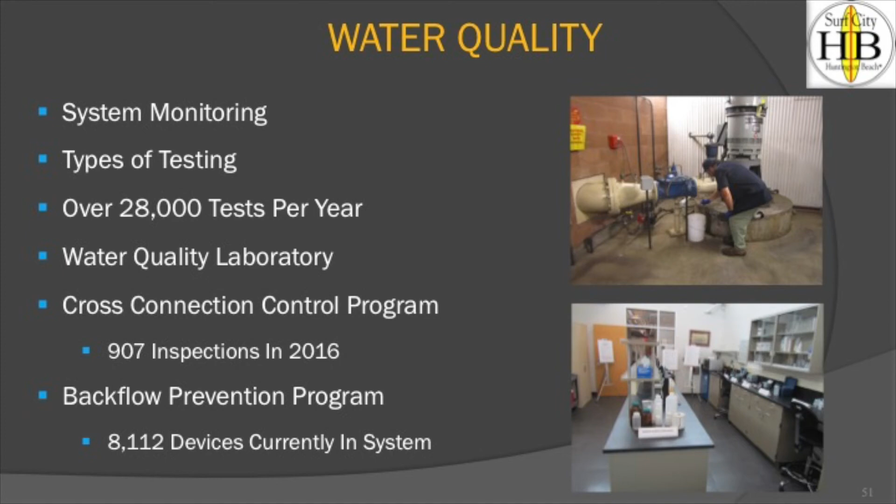On the sewer side, we have over 52,000 sewer laterals. Tom talked about the sewer lateral program—if someone gets street tree roots into the sewer laterals, we'll go out and inspect the portion within the public right-of-way and repair it if necessary. We also have the capability to put a closed-circuit TV down into the sewer line to check for roots, broken pipe pieces, and other issues, to make sure the infrastructure is properly maintained.

Over 7,000 manholes and 360 miles of pipe.

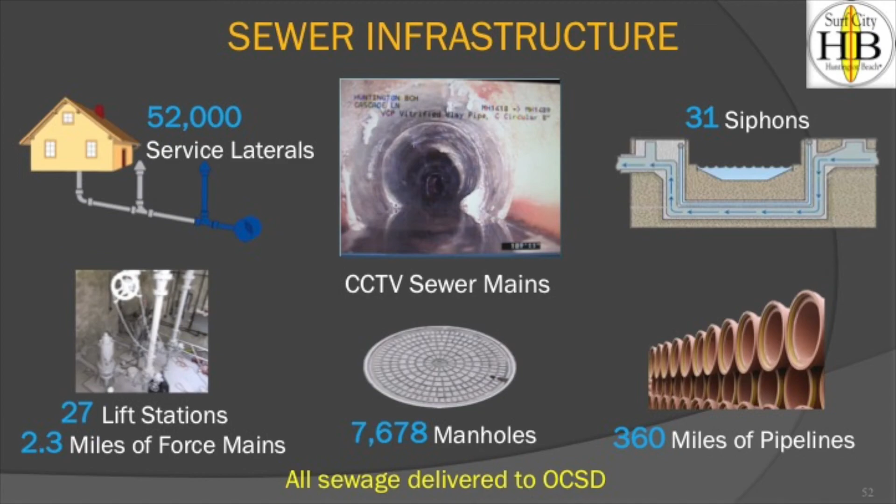In addition, my division is also responsible for the water conservation or water use efficiency activities of the city. During the recent 5-year drought, they were doing public outreach and taking phone calls about people complaining about others overusing water or letting water waste go down the street.

We also have the city warehouse, with about $1 million worth of inventory there. It has everything from fire hydrants and pipes to janitorial supplies and other things that we take care of.

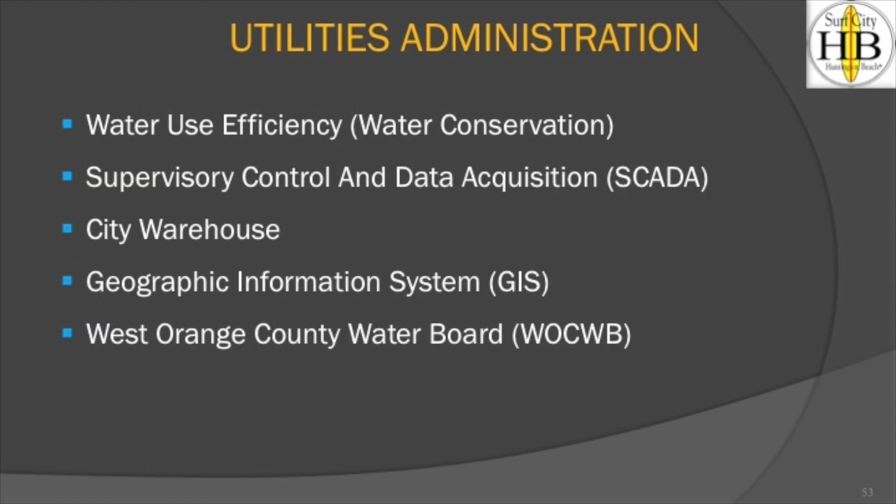With all our infrastructure, including 27 sewer pump stations and 15 storm drain stations, we can monitor what's going on at those facilities 24/7. If there's a problem, the computer system will recognize it and can call our on-call staff, who can pull out a laptop, log into the system, and find out what the problem is, deciding whether they need to respond immediately or if it can wait a day or two, such as on a weekend. We monitor all of our systems to make sure we don't have any problems.

The Geographic Information System is a large mapping system which generated all of the maps and everything you see around you. That's part of our tour tonight, so I won't go into detail about that now.

The West Orange County Water Board is a joint powers authority between Huntington Beach, Westminster, Garden Grove, and Seal Beach that owns and operates 2 of the import water pipelines, bringing water from the Metropolitan Water District main transmission mains into those 4 cities.